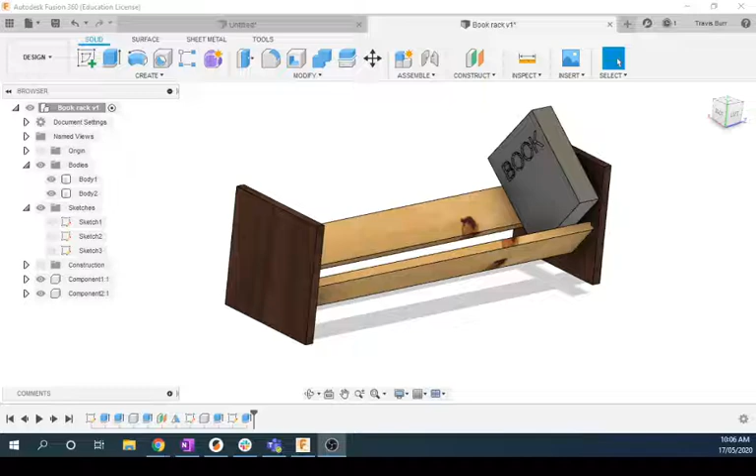Let's take a look at how we can make this simple little book rack. With this one, we're going to be able to make the whole thing from a single sketch. So if you take a look at it, what we've got is four pieces.

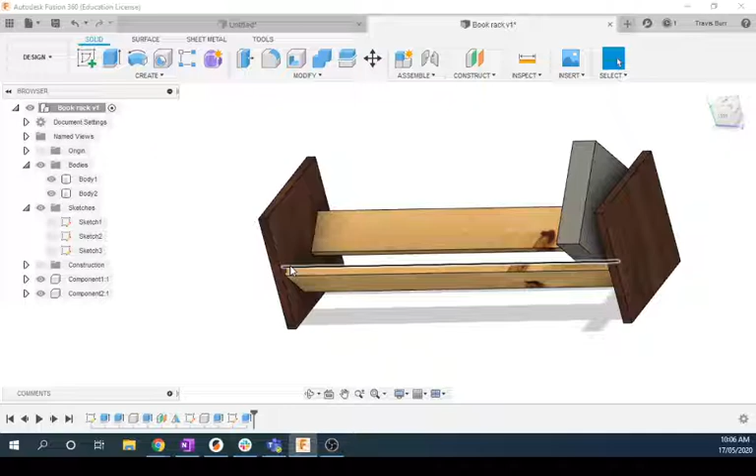Essentially, it's just two sides with two little slots cut in it, and two traditionally cut pieces of wood that can fit into those two slots. So the idea is these end pieces are CNC cut, and these are just provided and cut on the table saw.

Real simple little project, and it gives you a chance to really personalize something that you can make in the class. So what I'm going to do is create a new file here, and we're going to start off by sketching one of those end pieces.

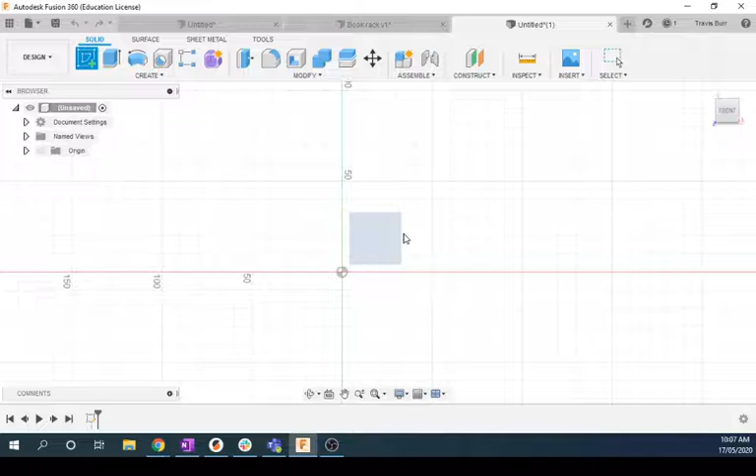So I'll create a sketch, and I'll just create it on the XY plane here. I did the XY plane because, again, if we're doing this on the CNC, it's good to have the Z plane going towards you. And I'm going to set a couple parameters.

So I'm going to modify, change parameters. Let's say I want the length of this to be 600 mils. I want the height to be, let's say, 200 mils. You can change this stuff later. I want the material thickness to be 15 millimeters.

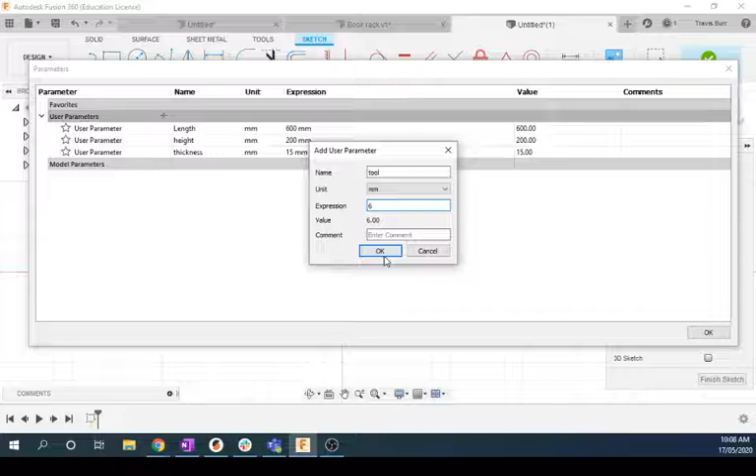And we're going to be using a tool bit again. So our tool, again, we'll just use that 6 mil that we used last time. All right, so we got our parameters set up. We go OK, and I'm just going to draw a rectangle.

We're going to go our height, tab, and we're just going to make it square, so I'll go height again. And enter. And then that's giving me this rectangle.

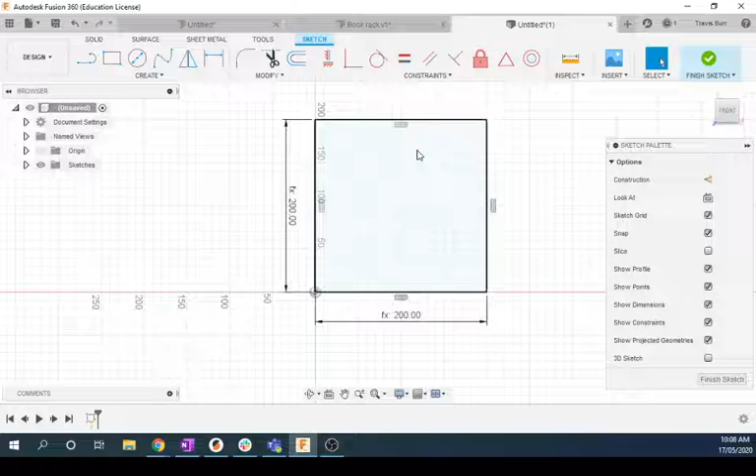So once we've got that, we need to start looking at the angle that we want our books on. So I'm going to grab the line tool, and I'm going to change the line to a construction line by clicking on this guy here.

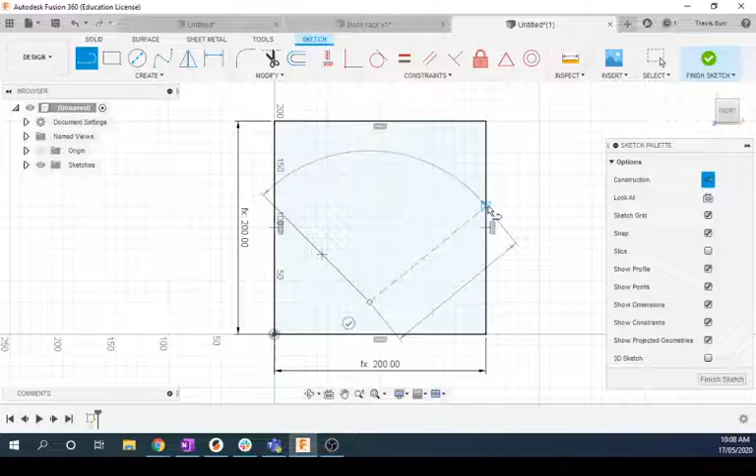And I'm just going to draw a line down. I'm not too concerned, I'm going to dimension this into place, and a line there. So this will be the angle that my books are sitting on.

Turn that back off. If I go to create sketch dimension now, I can dimension from here to here, and I just want that to be 90 degrees, the same as what the books would be. That gives me that angle. Hit the escape key to get out of the dimensions.

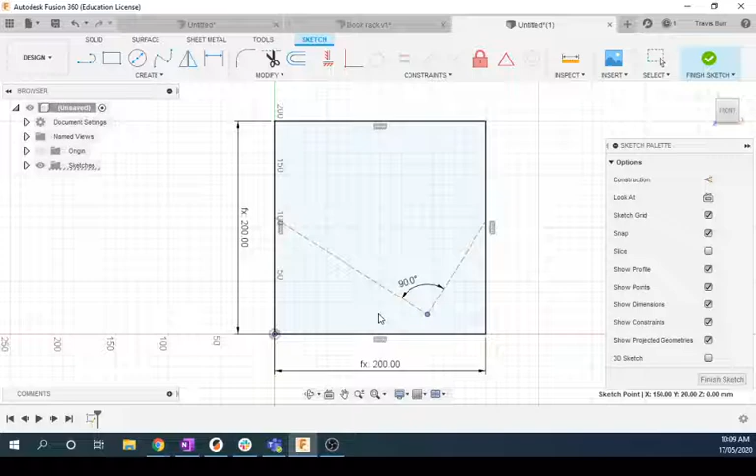You can move this around now and determine how you want your bookshelf to look. So it can be over here, it can be over here, it can be centered. This is just changing the angle that you're going to see the books at. So you can play around with it, you might need to add a couple other dimensions to make it fit. So you can play with it that way as well. So I'm happy with mine looking like that.

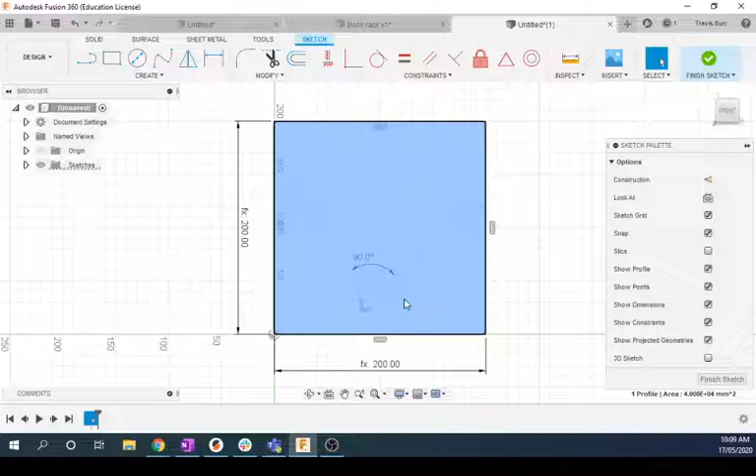So now what I'm going to do is draw in those two shelves where they're going to be sitting. So I'm going to use the line tool. I'm just going to start from here and drop. Now, we're going to be using 70 mil pine for this, so I'm going to type in 70 because I know that's my dimension. And hit enter, and you can see there's my line.

I'm going to come here. I'm going to go up so I can see that little square. That little square that's showing up in the corner is telling me that this is perpendicular, 90 degrees. So here I'm going to go thickness, and that gives me my thickness.

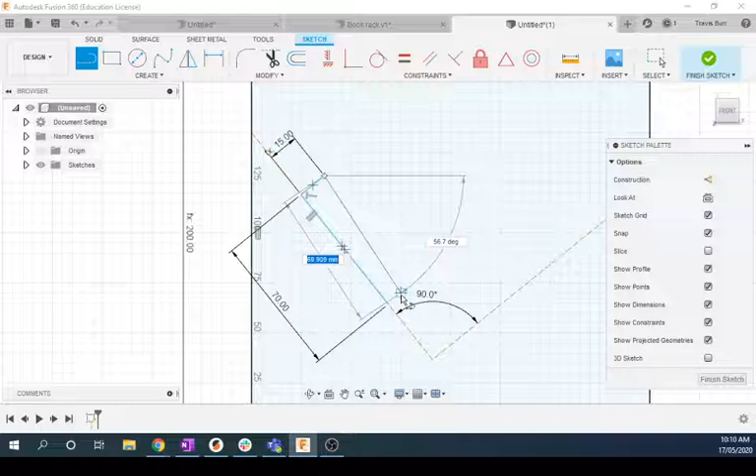I'll take my line tool again. If I mouse over here, you'll see I get a nice - oh, maybe not this time. Anyway, I've got my perpendicular again. So I'll just go 70.

And one more line connecting those. And that looks good. Just to check, I could always go parallel and make sure that this line is parallel to that line. It's giving me an error, so that normally means it already is parallel. So that looks good for that one.

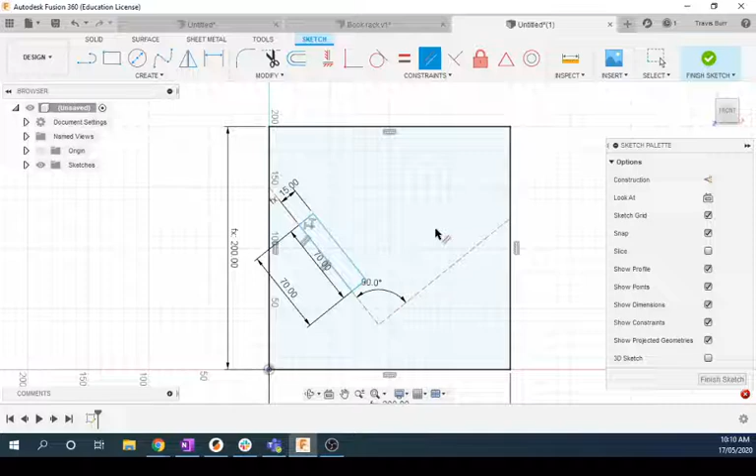So my other one will be sitting over here. So again, I'm going to come over, and it's kind of up to you where you want this to sit. You can dimension it later. But we're going to come up this way. Along that line, we'll go 70 again.

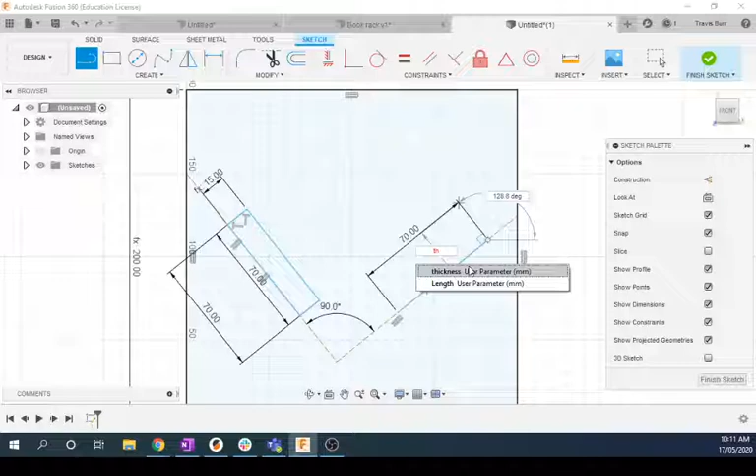We'll go up this way, and that'll be our thickness. Coming back, we'll do 70. We could have used a constraint for that 70, by the way, but for the sake of this one, we didn't.

Alright, so we've got that added back in, and again, if you want, you can check and see, okay, is this parallel to that? It's going to give me an error because it already is, and that's okay. So we've got the dimensions there. So that's going to be our two shelf pieces that the books sit on.

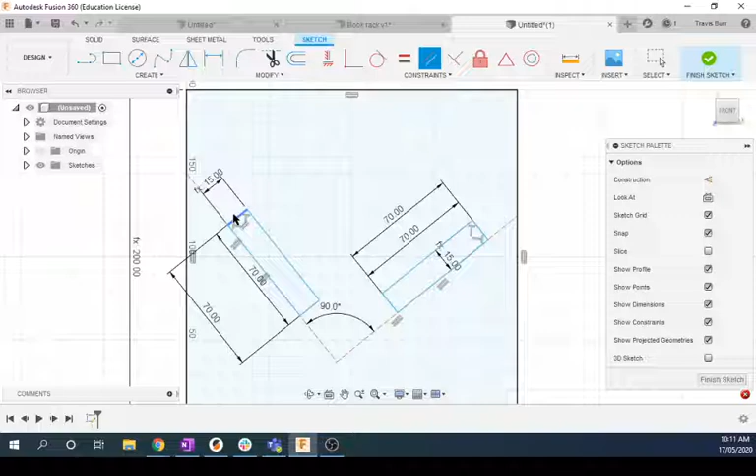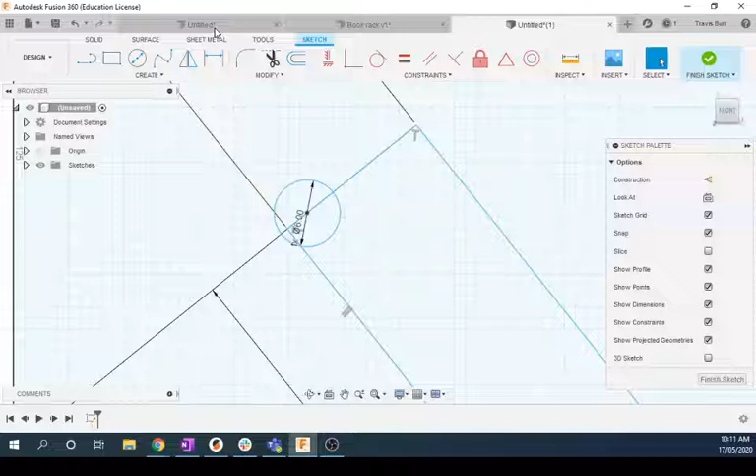Now, like we did in the shelf the other day, we added some circles to the corners, and that was to give us some clearance for our tool bit. So I'm going to come up here, grab that circle tool, and I'm going to say that this is my tool diameter, like so, and I'm going to use the tangent tool to connect those. So again, I'm coming in here, the diameter is the tool, that's 6 mils.

I hit enter, tangent to there. So I've got them all tangented in, and I'm going to go around and do the same thing to all the other ones.

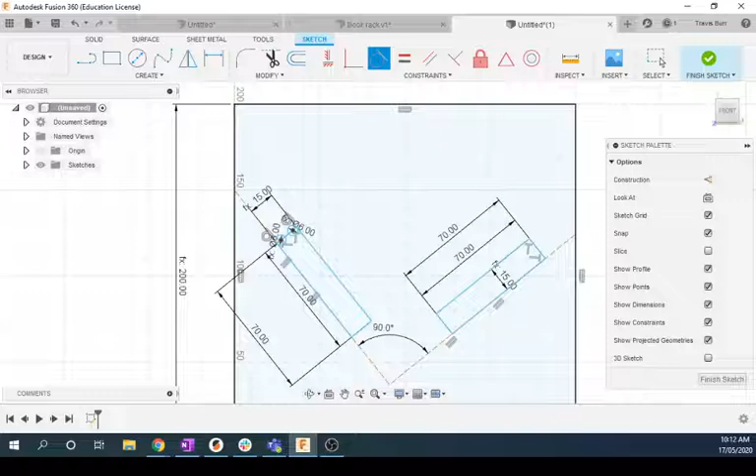Okay, so I've gone through and I've added those circles in. You can see we've got them there. I'm not worrying about trimming any of this because I'm going to use pretty much all of this geometry as we go. So that's the single sketch we'll make this whole part from.

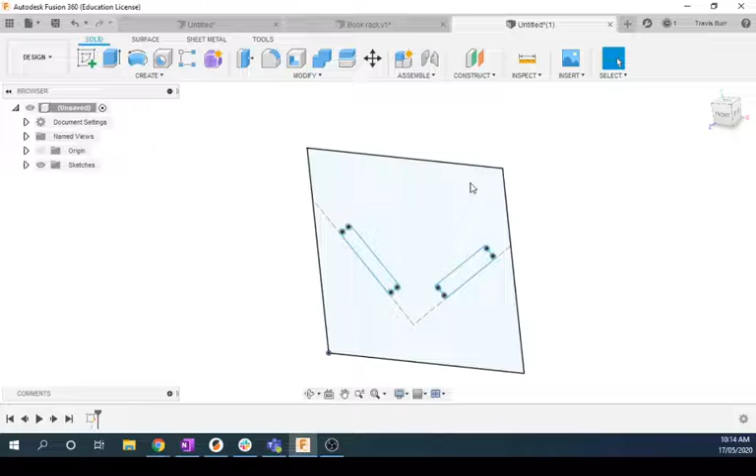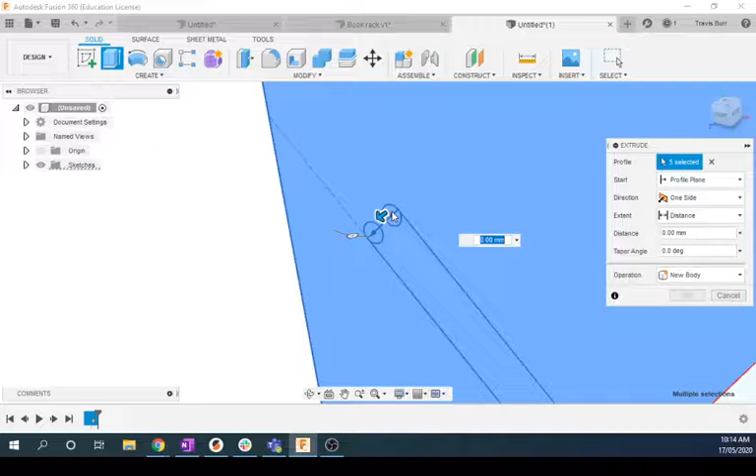So if I go finish sketch now, there's my sketch. And we're going to start off by doing an extrude. I'm just going to extrude everything, grabbing all the stuff, because this is just going to be the side of it, the side that's solid.

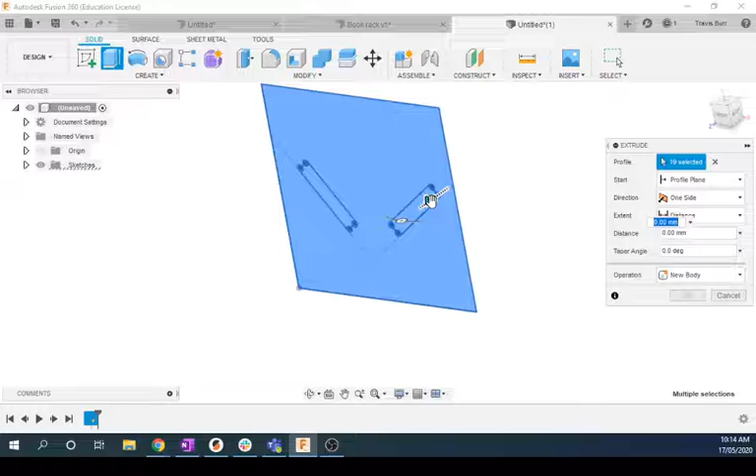Zoom in on that one, get it a bit better. Alright, so I've got all of that, and we're going to extrude this out, and I want to extrude it thickness divided by 2, because those other marks on the inside are going to turn into pockets later. So okay, thickness divided by 2. I hit enter, and I end up with just this rectangle.

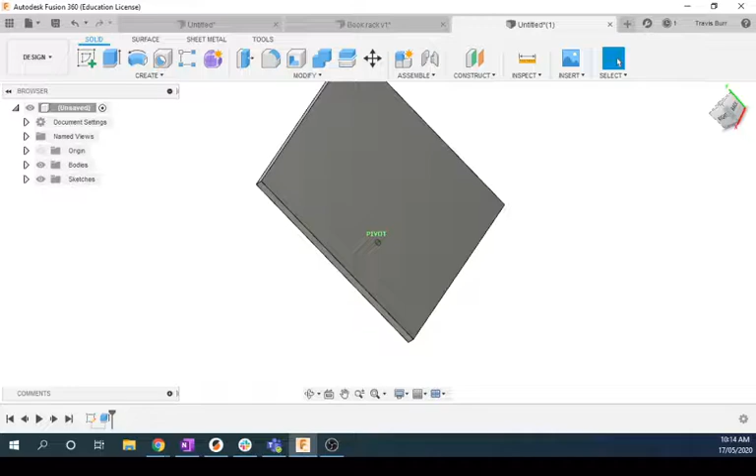I'm actually going to come back, right click on this and say create component from body, just so it's a separate component. And I can go to my sketches and turn that sketch back on. So now you can see I've got my sketch back.

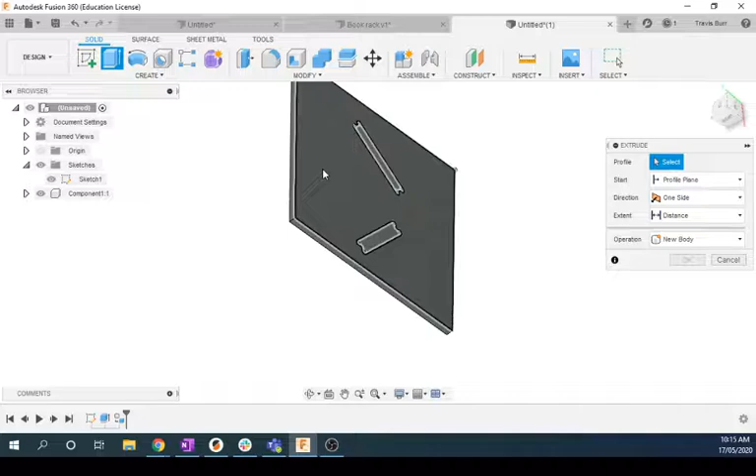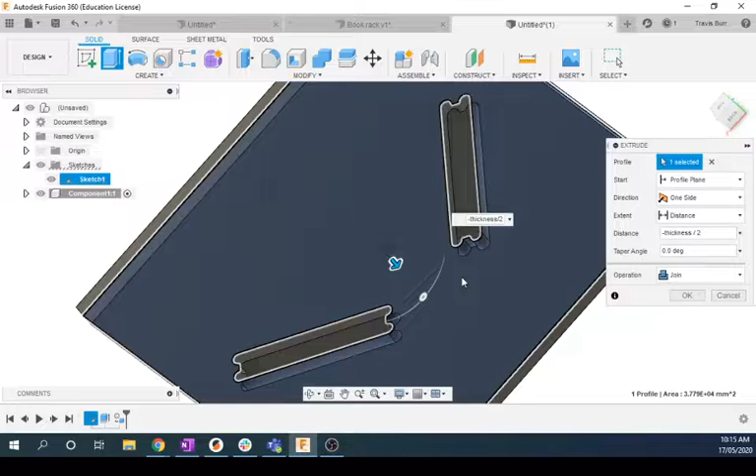And I'm going to go OK. If I turn that sketch off, you'll see the lines disappear, and that just gives me that nice piece. Alright, so the next thing I want to do is we need to mirror this over. So I'll just turn the sketch off for a second.

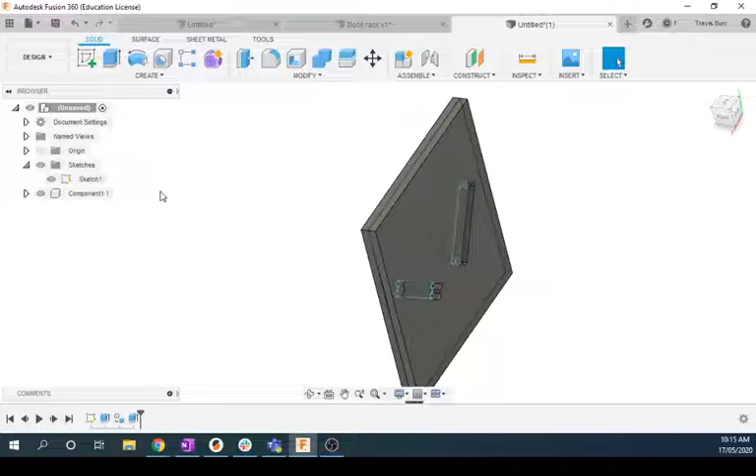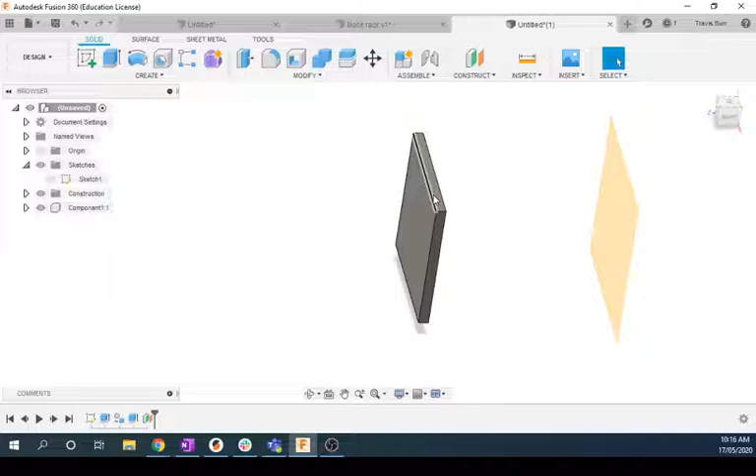We're going to go to the construction plane again. I'm going to click on that, and come here to this side. We're going to make our, I think we said length, so I'm going to say negative length, and again divide by 2 because I want this in the middle. So I've got my construction plane there. Again, negative length divided by 2 because it's the center. Length is our total thing.

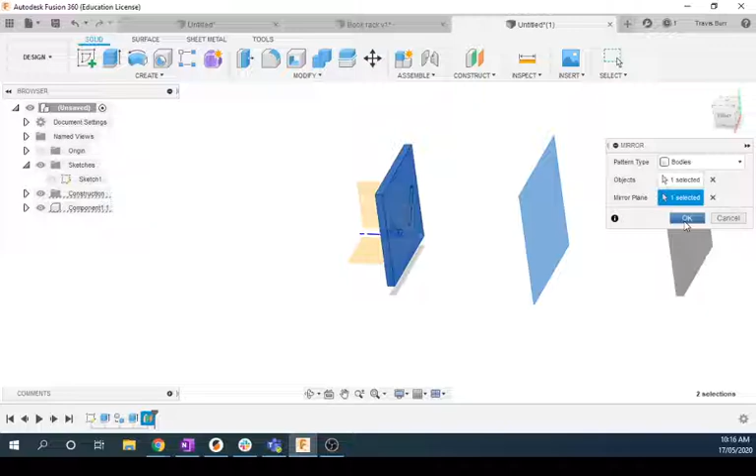I can go to create and mirror. I want to mirror this on my mirror plane there. Just make sure this says bodies or components - they should work. We go OK, and there's our two halves. I don't need that construction plane anymore, so I'm just going to turn that off. Cool, so we've got these two pieces the way we like them.

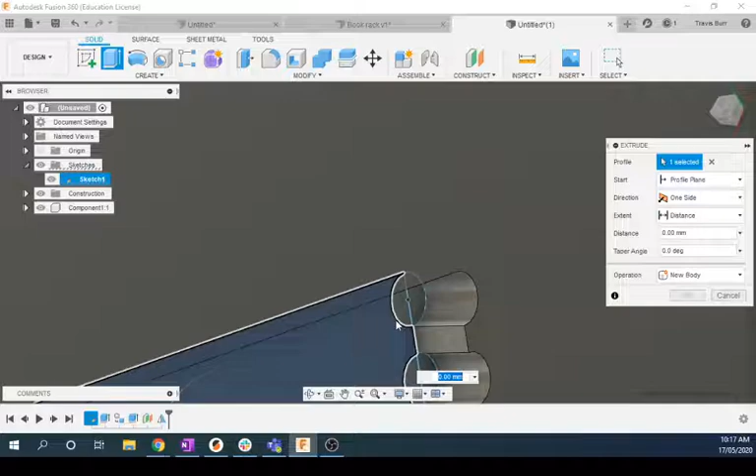I'm going to turn that sketch back on again, and we can see our geometry. So again, we're going to go extrude, and we're going to click that inside pieces here. I have to rotate a bit to get that selected. So there's one.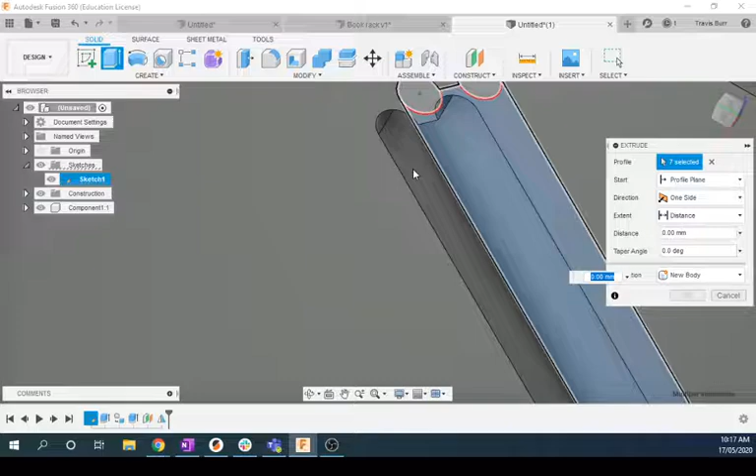Again, maybe just a little rotating - it can be a bit tricky to get all these bits. Alright, so there we go, I've got those selected. I'm going to make this new component now just to make sure I've got it as a new component.

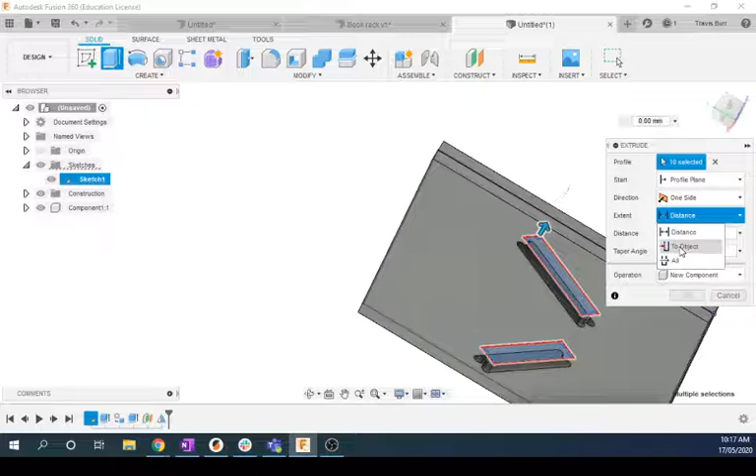My distance, I'm going to say to object, and we're going to flip it around and take a look at the inside here. So I want it to go to this surface. Click on that - you can see it's brought the two pieces over, it's still a new component. I click OK, and now I've got my bookshelf just the way I want it.

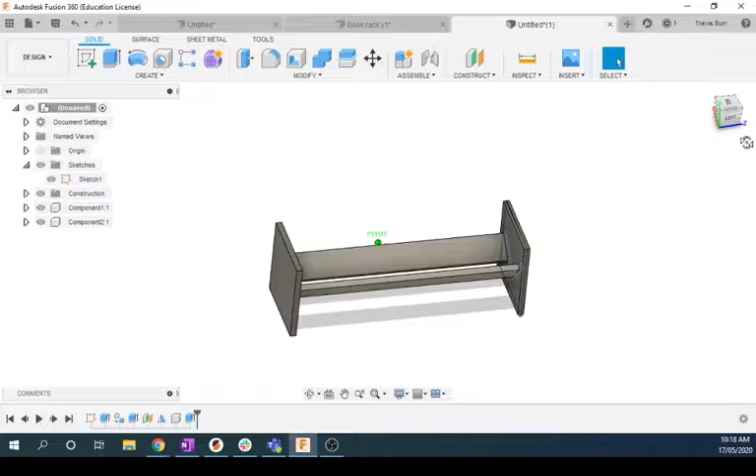Sketch off. Now, mind you saw that I had some different appearances. If I right click on this, I can go to Appearance, and you'll notice here there's a folder for wood. I just made the ends mahogany wood just because I like the color.

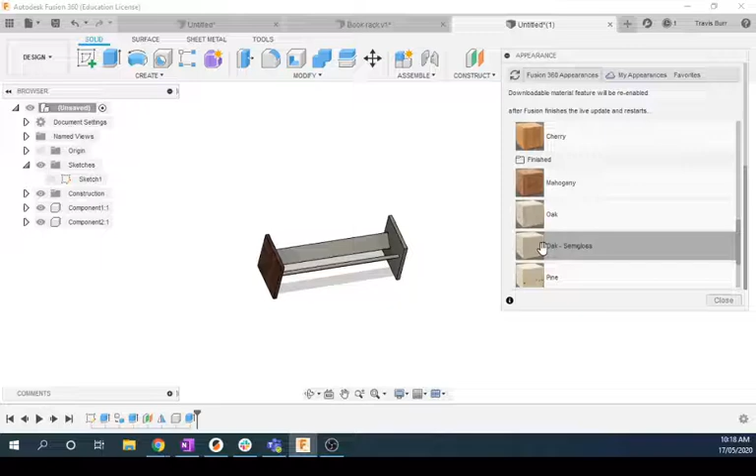So I'll do this one as well. And for the sides, for the inside pieces, we're going to make those out of pine. So that's how I made the colors like that. I'll let you figure out how I drew the book.

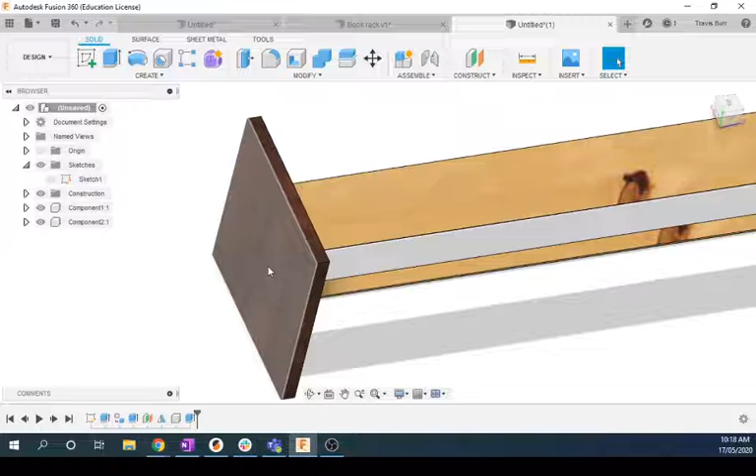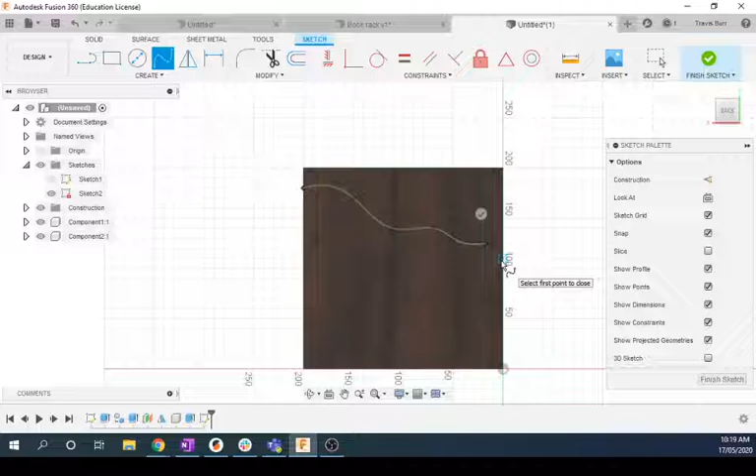So essentially, that is this project. Now, for yourselves, you got a chance to play at the angle on this, but you could also go back in and make a new sketch and modify what you want this to look like. So you say maybe you use the spline tool, and you could play around, have kind of a neat edge cut on the top of it, something like that, whatever you want.

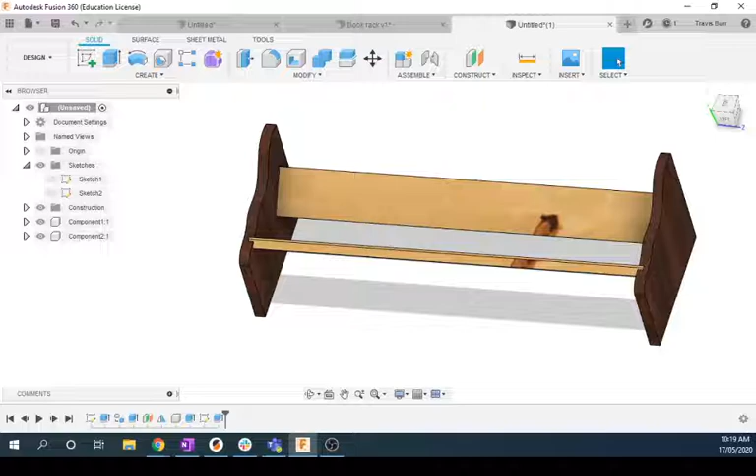Click the little check mark, and let's go finish sketch. And you can go through and have a play and just make it look the way you want it to look. Just be careful, like you see here, I cut into those holes - you probably want to avoid doing that if the stuff's going to stick out. Or maybe that's the shape you're looking at. But you can play around with that and make it however you want.

I'll leave it like that for now, and that will be the end of this video.